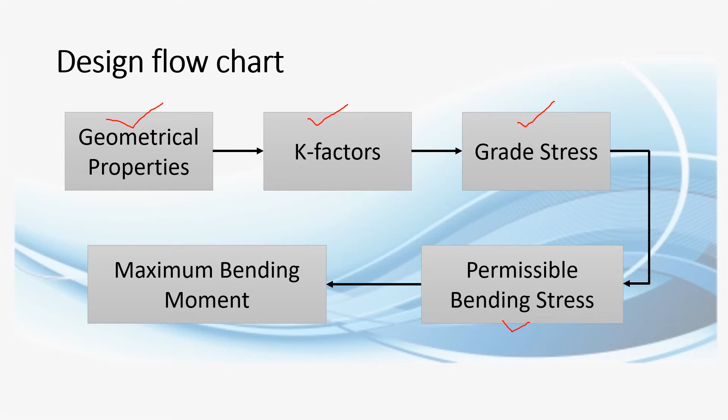This is our last lecture, part 2 of timber design, where I will introduce you to the design for flexure members. In order to design the flexure member, first you need to check the geometrical properties of the timber given, then determine the K factors and the grade stress, check the permissible bending stress, and lastly check the maximum bending moment.

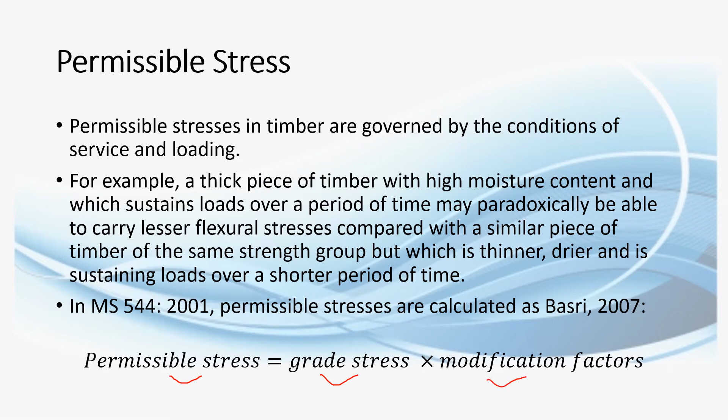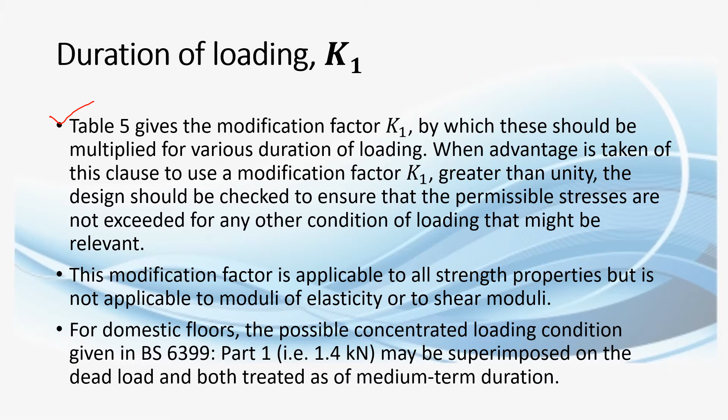Permissible stress in timber is governed by the condition of service and loading. It's given by this formula: permissible stress equals grade stress times the modification factors, or K values. This is the first K value, called the duration of loading, K1. It can be seen in Table 5, where it should be multiplied for various durations of loading.

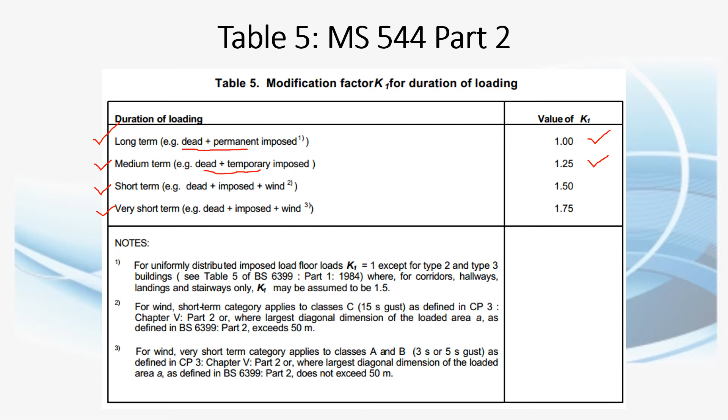For example, long term consists of dead plus permanent load, so the value of K1 is 1. For medium term, consisting of dead and temporary imposed load, K1 equals 1.25. Short term is dead plus imposed plus wind, equals 1.5. Very short term is dead plus imposed plus wind equals 1.75.

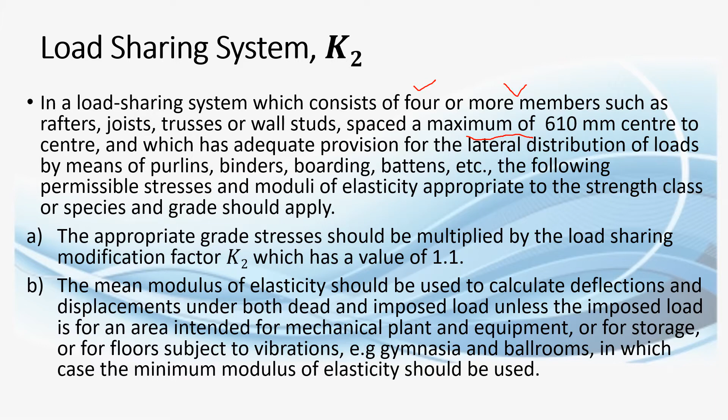Then the load sharing system, K2. The load sharing system consists of 4 or more members such as rafter, joist, trusses or wall stud. If a member has 3 or below, there is no load sharing system. This load sharing system should be spaced at a maximum of 610mm center to center, and the grade stress should be multiplied by the load sharing factor. So the value of load sharing system K2 equals 1.1.

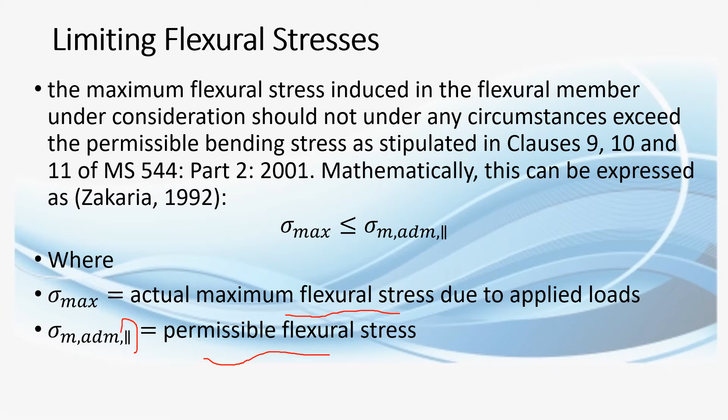The limiting flexural stresses: the actual maximum flexural stress should be lesser than or equal to the permissible flexural stress. The meaning of this line is parallel to the grain.

To design the flexure member, it should be noted that sigma m is not more than sigma m ADM. Sigma m ADM is the permissible flexural stress, determined by multiplying the grade stress sigma mg times the K factors. The grade flexural stress sigma mg can be seen in Clause 7, for individual hardwood and softwood. The timber flexure member is capable of sustaining bending stress safely if this condition is met.

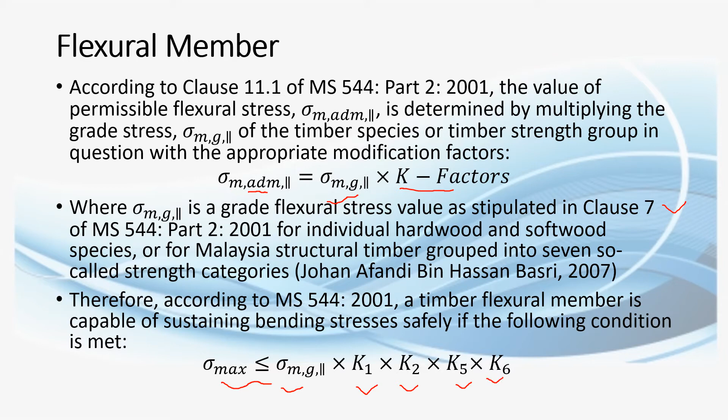So the maximum should be lesser than the allowable grade flexural stress times K1, K2, K5 and K6. Then K3 is the length and position of bearing.

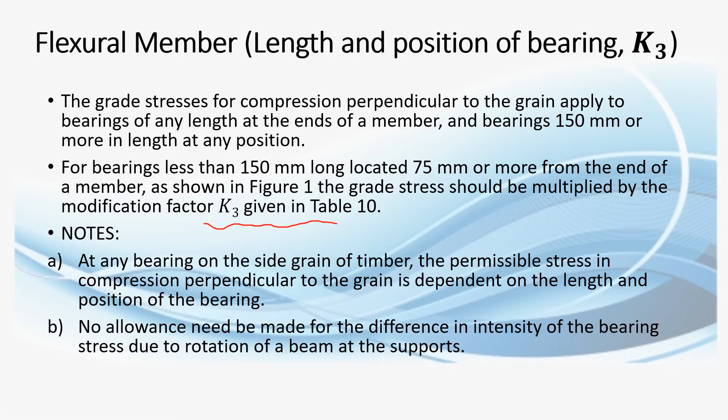Multiply with the modification factor given in Table 10. This is the position of bearing: this is bearing less than 150, and this is the end of the flexure member where the location is 75mm or more. In Table 10 of the Malaysian Standard, Modification Factor K3, if the length of bearing is 10mm, K3 equals 1.74. You can see all these values for each length of bearing.

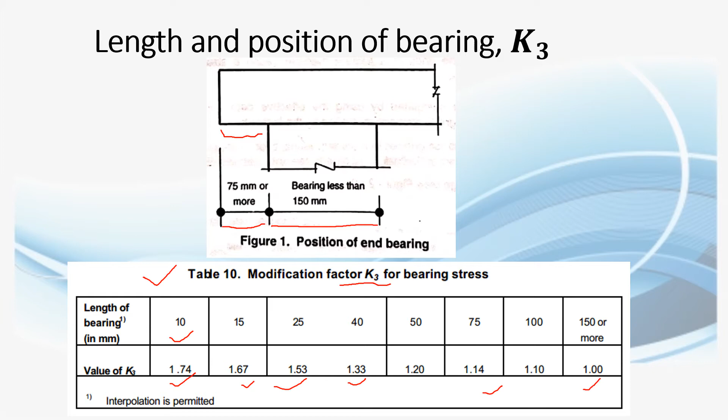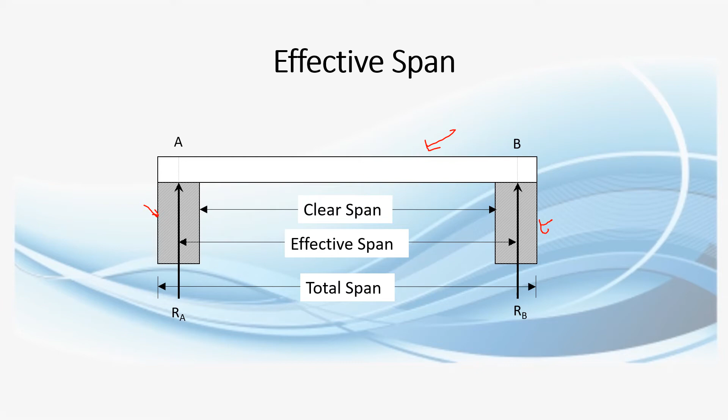For 150mm or more, K3 should be 1. Now, this is the effective span. Effective span should be taken as the distance between center to center of bearing, as given by this figure. This is the support, and this is the beam, while the clear span is measured from the faces of the support. The effective span is center to center of the support, and the total span is actually the total length of the beam.

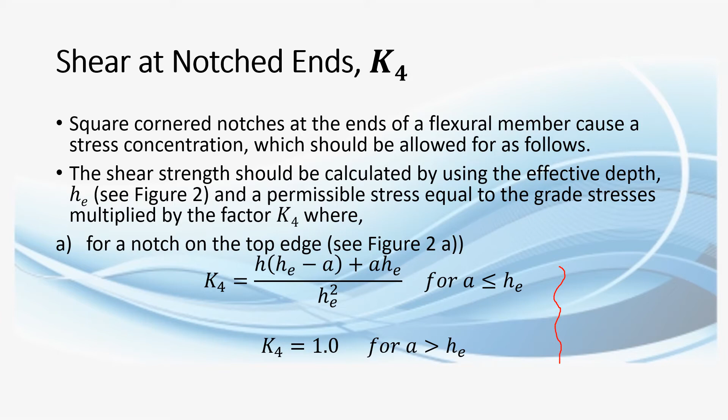For shear at notched ends, K4, the square cornered notched end flexure should be determined as follows: for a notch at the top edge, you use this formula, and for a notch at the underside, this formula. H is the total depth of the beam and A is shown in Figure 2.

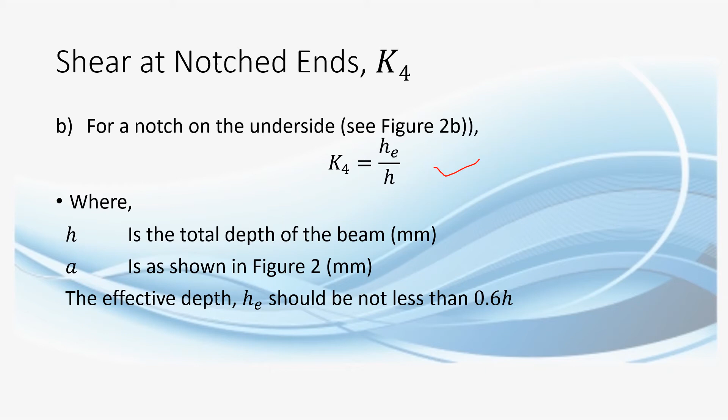HE should be not less than 0.6H. This is the figure of notched beams. HE is the effective depth of the beam—this beam has a notch on the underside, and this beam has a notch on the top edge.

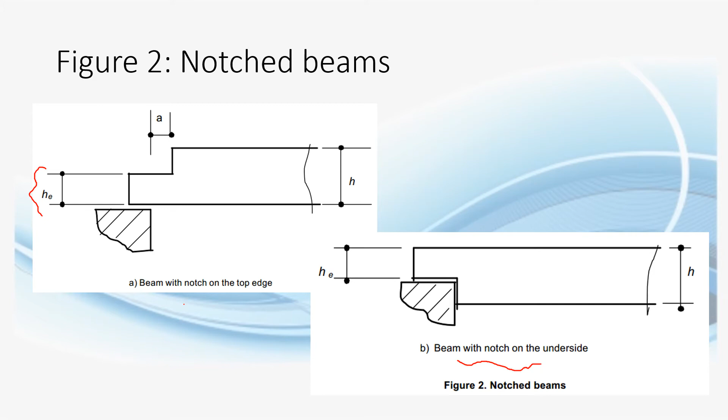Then K5, the form factor. Grade bending stress applies for solid members with rectangular cross section. For other shapes, the grade stress should be multiplied by the modification factor K5. For solid circular section, K5 equals 1.18. For solid square section, K5 equals 1.41. For others, K5 equals 1.

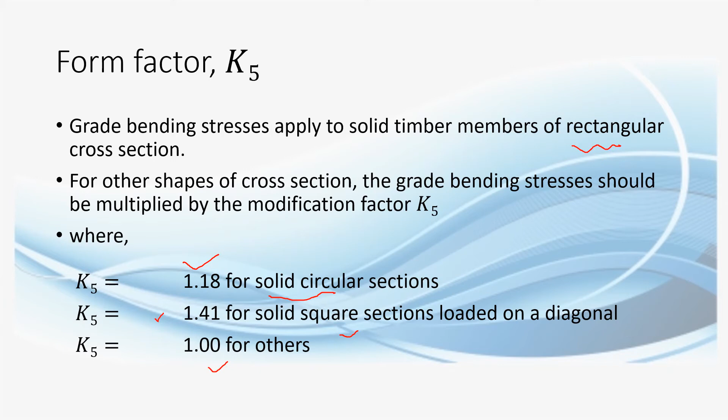Then K factor of depth factor K6. The grade bending stress given in tables 1, 2 and 4 apply to material having a depth H up to 300 mm. For beams greater than 300 mm, the bending stress should be multiplied by the depth modification given by this formula. For solid and glued laminated beams, for depth less than 300, you just take the K6 value as equal to 1.

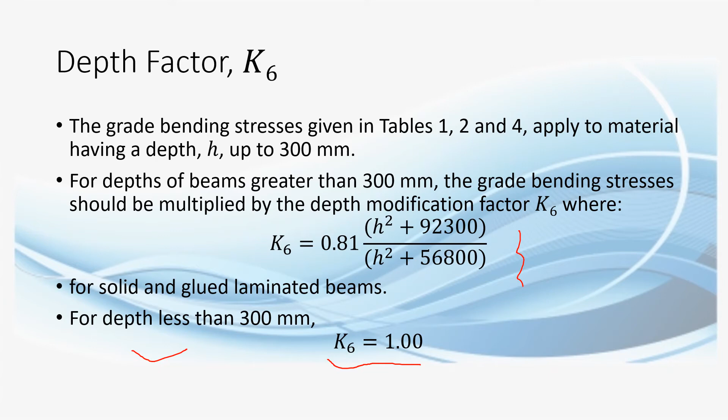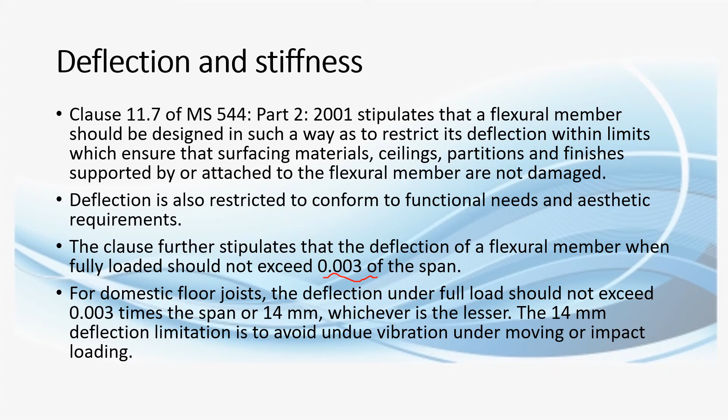Then you check for deflection and stiffness. The flexural member fully loaded should not exceed 0.003 of the span. For domestic floor joists, deflection under full load should not exceed 0.003 times the span or 14 mm, whichever is lesser. The 14 mm deflection is to avoid undue vibration under moving impact. The actual deflection should be less than or equal to the permissible deflection, which equals 0.003 times span or 14 mm, whichever is lesser.

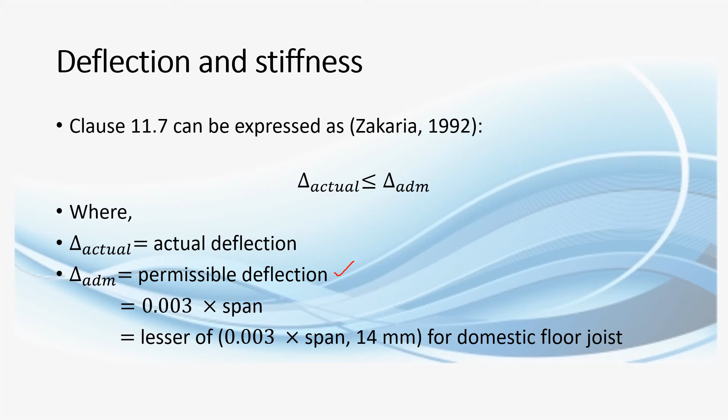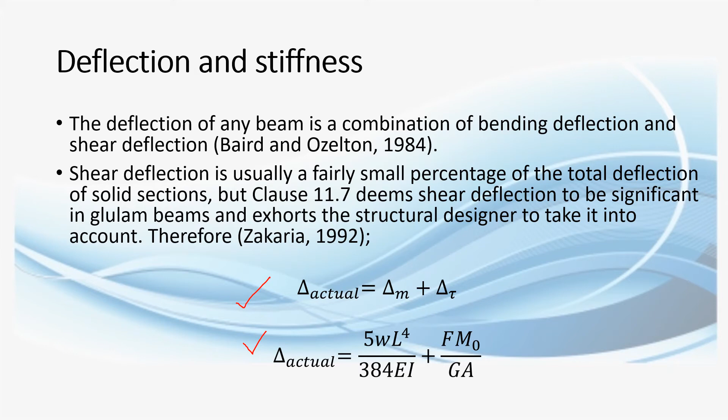This can also be checked for shear deflection, but I will not explain further. This is only for your own knowledge, continuing from the previous slide, which you can read through.

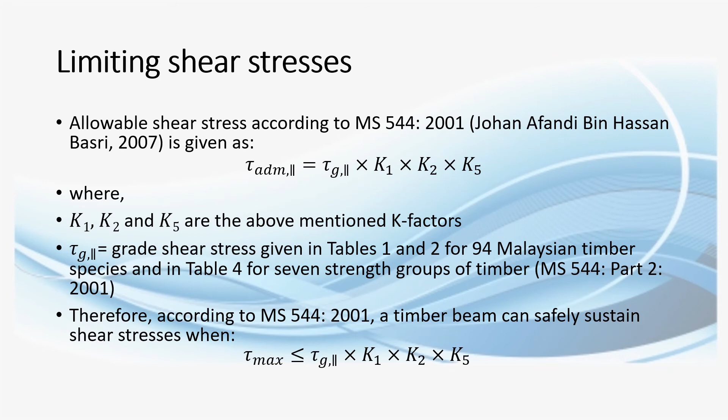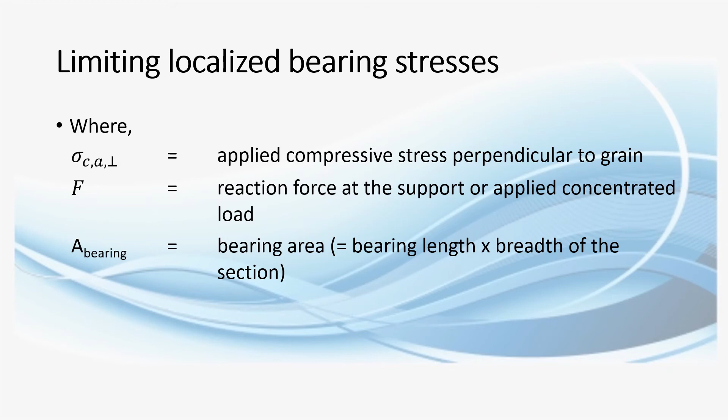Okay, now we go for an example. Here you need to determine the permissible bending stress parallel to the grain and the maximum bending moment for a beam, the main beam. The parameters are: interior beam with smooth surface, nominal size 50 by 200 mm, categorized as Kapur species with standard grade, and has a long-term duration of loading with no load sharing.

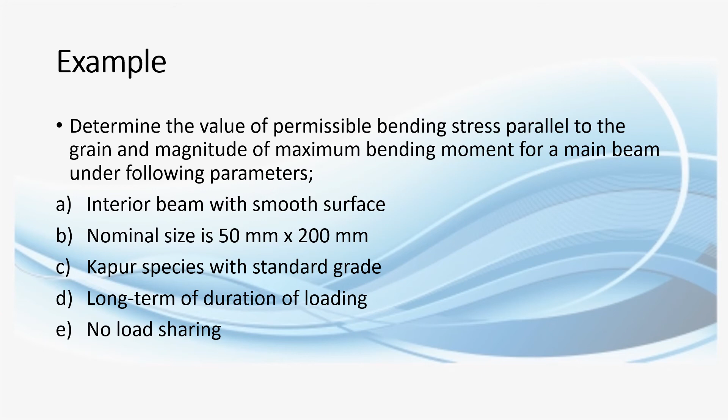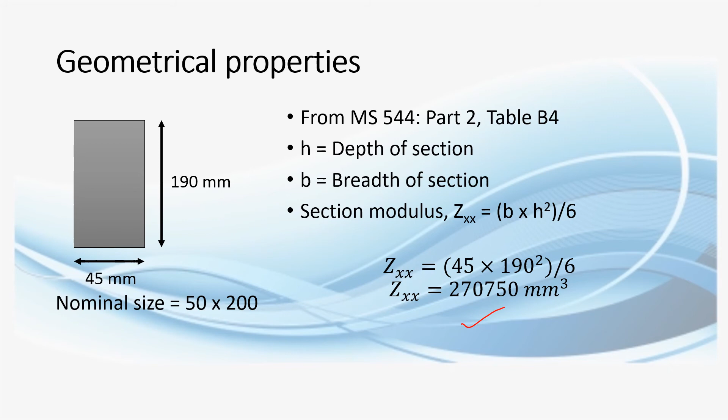Check for the geometrical properties of nominal size 50 by 200. You can refer to Malaysian Standard Part 2 Table B4. The depth is h, b is the breadth of the section, and the section modulus is given by b times h squared divided by 6, giving this value. Then determine each of these K factors, K1 through K6.

The value of K1: we know it's long term with only dead and imposed load, thus the value of K1 is equal to 1.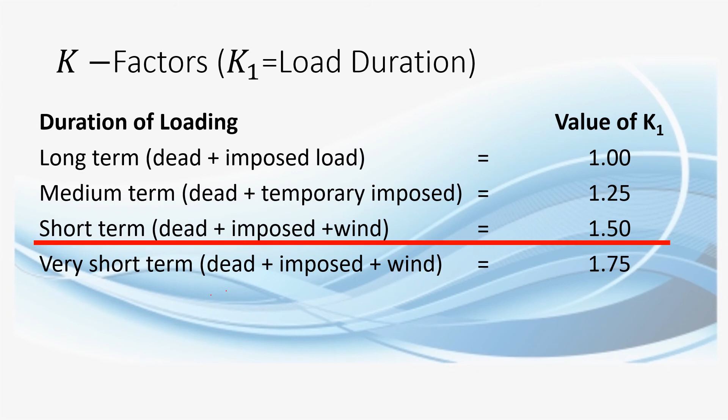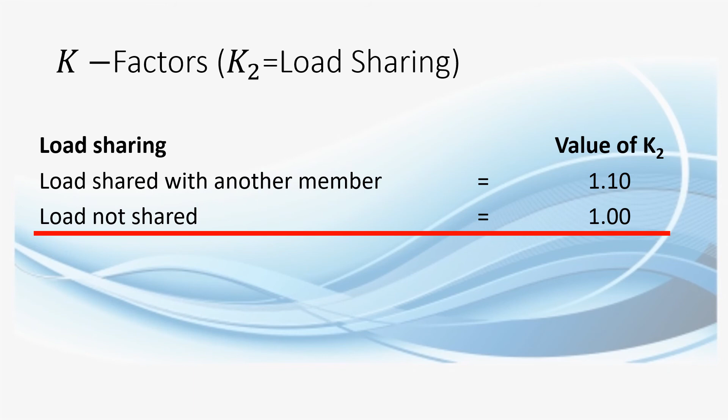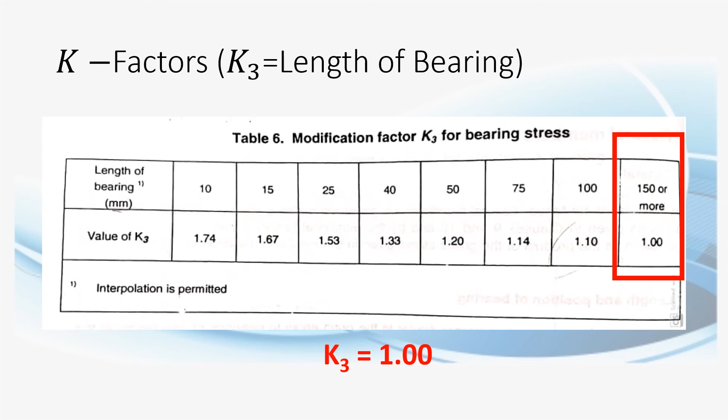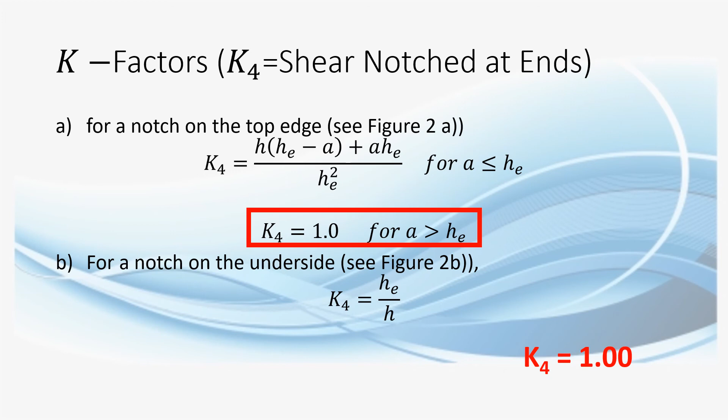The parameter for K2 is load sharing, but this example has no load sharing, so K2 is equal to 1. For length of bearing, because it has more than 150 mm of bearing length, K3 is equal to 1. K factor K4, shear at notch end: for a notch on the top edge, K4 is equal to 1 because the A value is more than the effective depth. Form factor K5, because it's rectangular, is equal to 1. K6, the depth factor, because the depth is less than 300 mm, is also equal to 1.

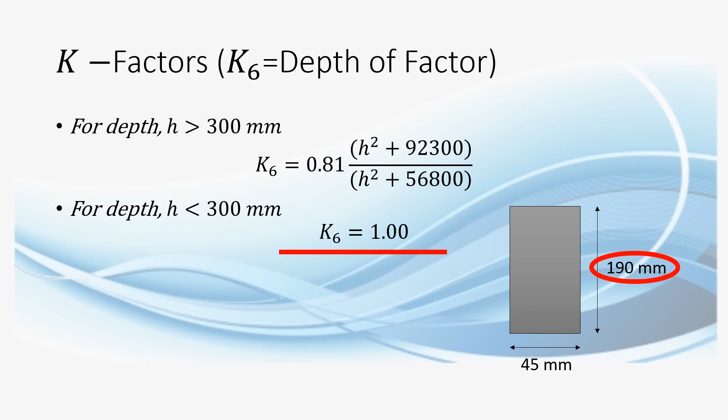So here we have a summary of all the K factor values for this example: K1, K2, K5 and K6. K3 and K4 are not needed because those parameters don't apply here, so we only have 4 K factors.

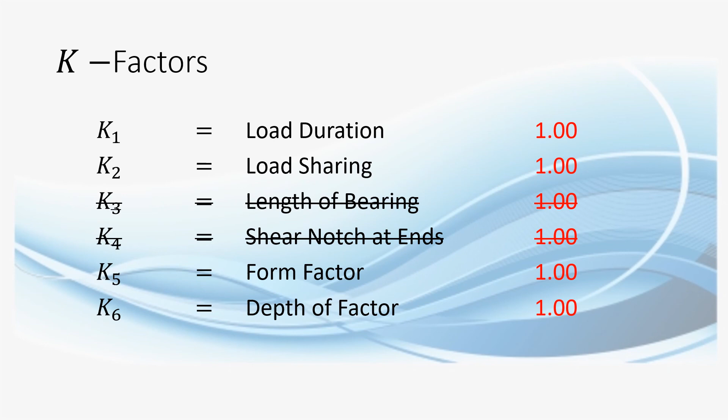Check the grade stress from Malaysian Standard Part 2, Table 1 for wet grade and Table 2 for dry grade. We have a Kapur species standard grade, so check the parameters from these tables. We can see the bending parallel to grain is equal to 17.3 Newton per mm squared. You need to check Table 1.

And the permissible bending parallel to grain for standard grade, STD: check for STD. The permissible bending parallel to grain equals the grade stress times the K factors. So 17.3 times all the K factor values equals 17.3 Newton per mm squared.

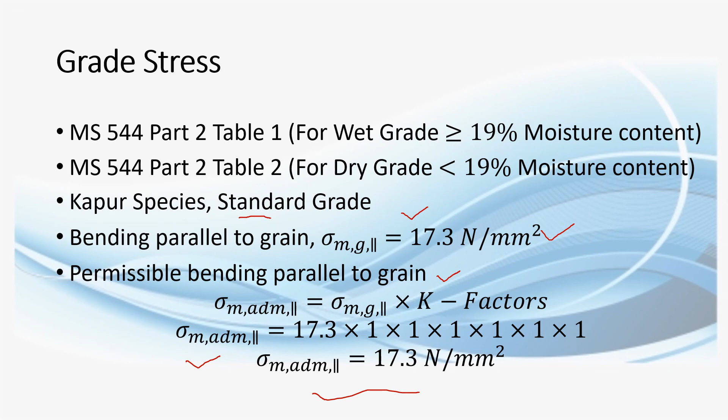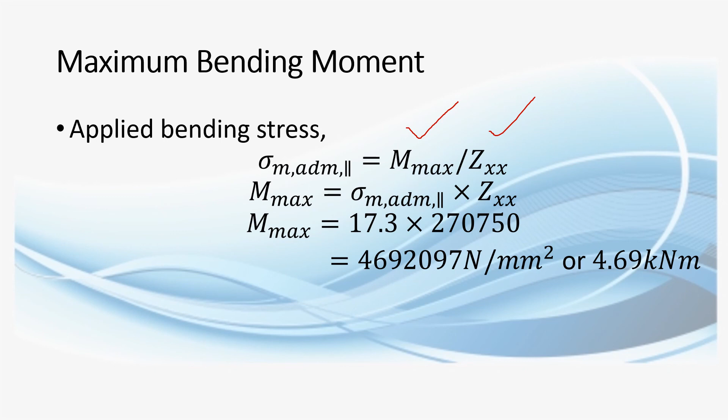Then calculate the maximum bending moment. The permissible bending stress equals the maximum moment divided by ZXX. So M max, the permissible moment, equals the permissible stress times the value of ZXX. We get the value of maximum moment equal to 4.69 kilonewton m. Okay guys, thank you, that's all.